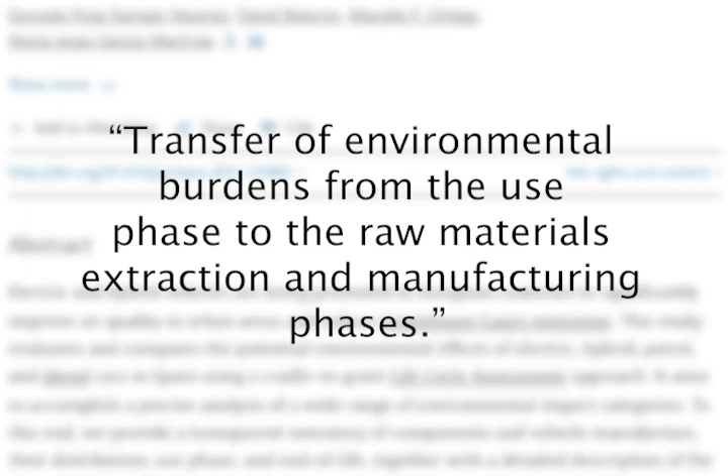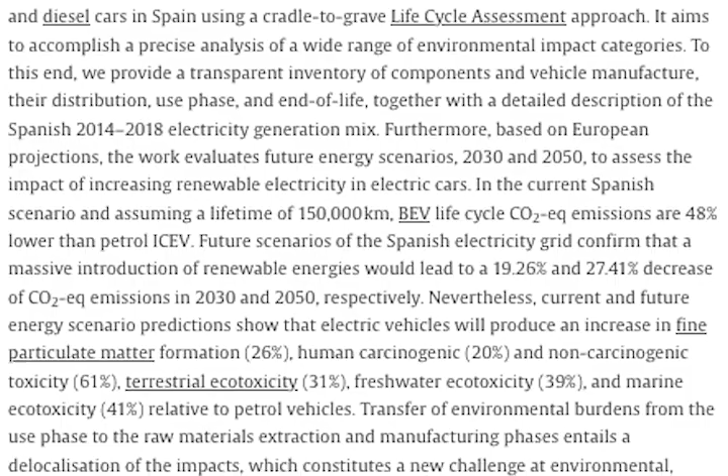Number 2, life cycle assessments reveal that electric vehicles, quote from the Journal of Cleaner Production, transfer environmental burdens from the use phase to the raw material extraction and manufacturing phases. It entails a delocalization but not disappearance of socio-environmental issues. For example, EVs' use increase marine ecotoxicity by 41% relative to petrol vehicles.

Number 3, EVs might have zero tailpipe emissions, but disregarding production and electricity generation impact is misleading. EV production creates between 12,000 and 20,000 kilos of CO2. Because our project works with used engines, there are no production emissions. The manufacturing of our system contributes less than 1 kilo of CO2.

The burning of vegetable oil creates around 0.2 kilos of CO2 per kilometer. Likewise, current electricity dependence on fossil fuels still creates 0.1 kilos of CO2 per kilometer driven for an EV.

Number 4, what do we do with the millions of diesel vehicles on the road today? Scrapping them would be a vast waste of resources. By using vegetable oil as a fuel source, we can continue to use vehicles that have already been manufactured, without depending on the continued extraction of fossil fuels.

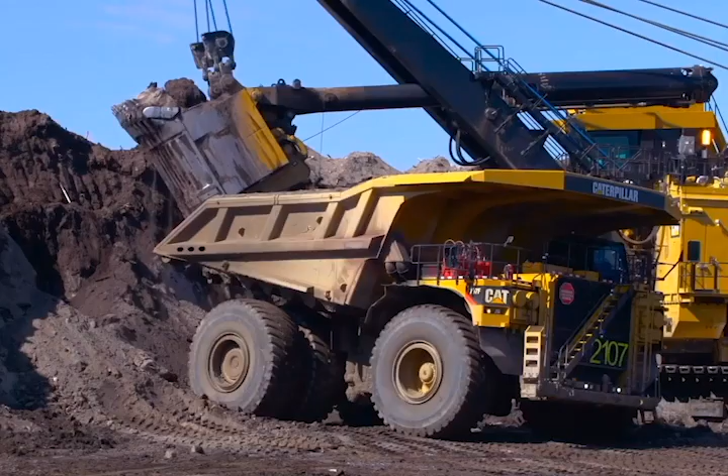Here in Canada, oil extraction from Albertan oil sands is, quote, one of the most environmentally degrading processes humankind has ever perpetrated, end quote, creating toxic tailings ponds visible from space. Waste vegetable oil is a renewable resource that is a waste product from the restaurant and fast food industries.

As living costs continue to rise, our fuel source has zero cost as restaurants usually pay to discard it, alleviating the financial strains of the average Canadian family who spends over $280 a month on gas. In addition, the global market for alternate fuels is projected to experience significant growth, already an additional $100 billion in the period of 2021 to 2022.

This is not all to say that we should discard electric vehicles and other new technology. As with anything, an energy transition requires balance and realism. We propose that our project can be a stepping stone to something greater. It raises important considerations for any new technology and highlights the importance of reducing consumption through reuse.

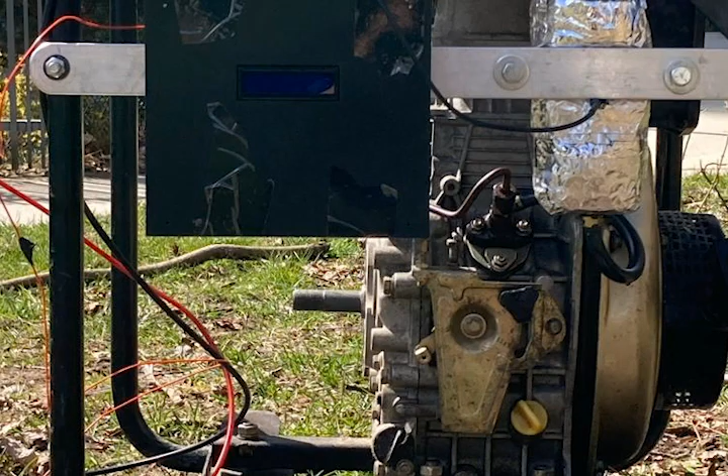Along with other research and innovations in the waste vegetable oil and biodiesel markets, we will contribute to a more sustainable future. The Veggie Motor Project aims to build a multi-component heated fuel filtration system that allows a diesel vehicle to run 100% on used vegetable oil, without chemical treatment.

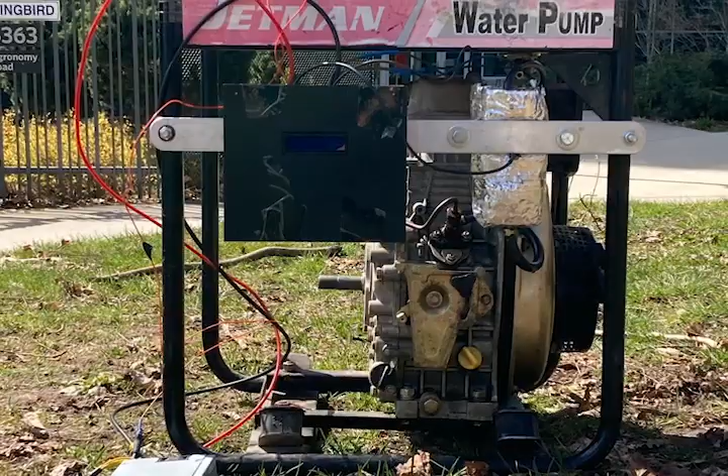Our current prototype consists of a heating system that can be integrated into a diesel engine's fuel system, allowing the engine to run solely on filtered vegetable oil while maintaining longevity and reliability. The scope of this project was to heat vegetable oil to 70 degrees Celsius. At this temperature, the oil will have a similar dynamic viscosity to diesel at room temperature.

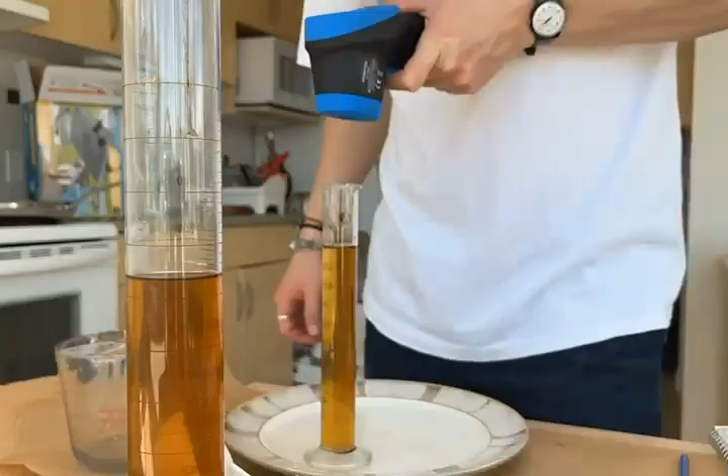This means that the vegetable oil can be used as a substitute for traditional fossil fuel without causing damage to the engine or its components and avoid excessive pressure buildup in the injectors. A basic viscosity test was conducted by measuring the time a metal ball takes to fall a set distance when immersed in oil at 70 degrees Celsius and less, going down in 10-degree increments. We compared the same test done with diesel.

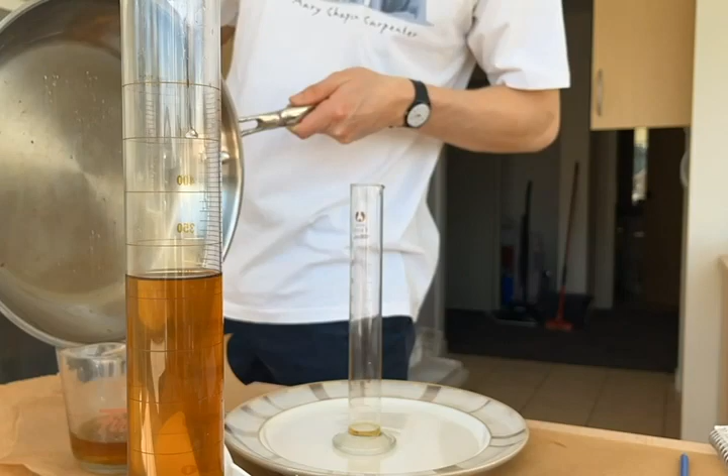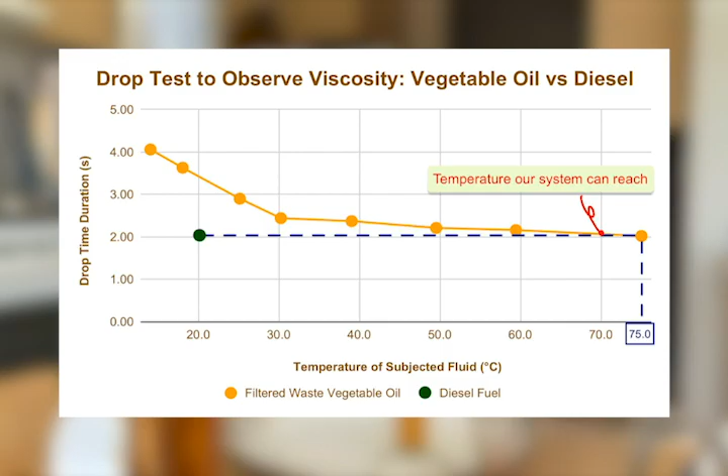The vegetable oil we used as fuel is olive oil from Jam Jar Canteen. Here is the graph of our results, and we see that around 70 degrees, the time for both vegetable oil and diesel are similar. We also tested if our single-cylinder diesel engine we acquired from a blueberry farmer in Surrey can run with vegetable oil at room temperature.

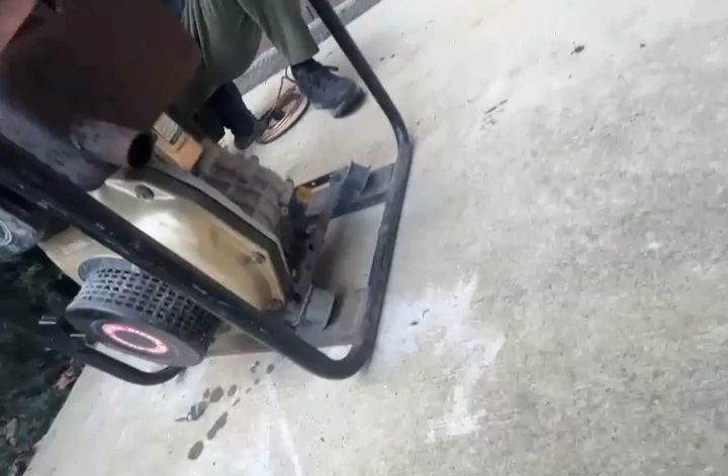As you can see, the engine ran on used vegetable oil with no issues. What are the components of our design? Here is a schematic of our final design, including the tank, heating system, electrical system, and engine.

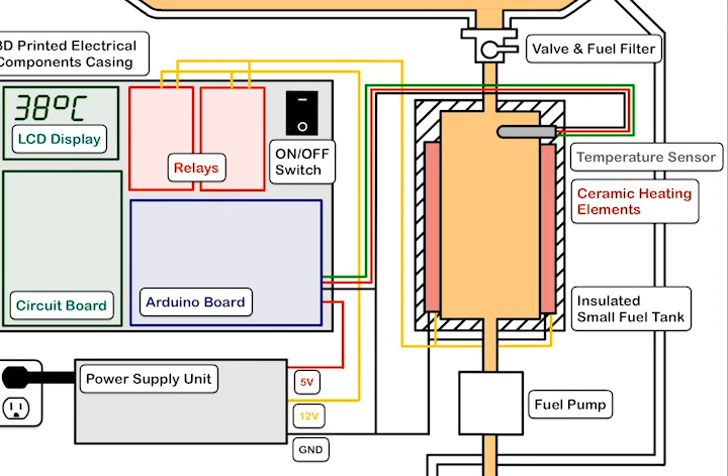The fuel system consists of two primary pressure zones. The low pressure zone is between the fuel tank and the fuel pump, while the high pressure zone is from the fuel pump to the injector. A secondary fuel tank is added to the low pressure zone. This tank is made of steel welded into a rectangular shape, and it can hold approximately 350 milliliters of fuel.

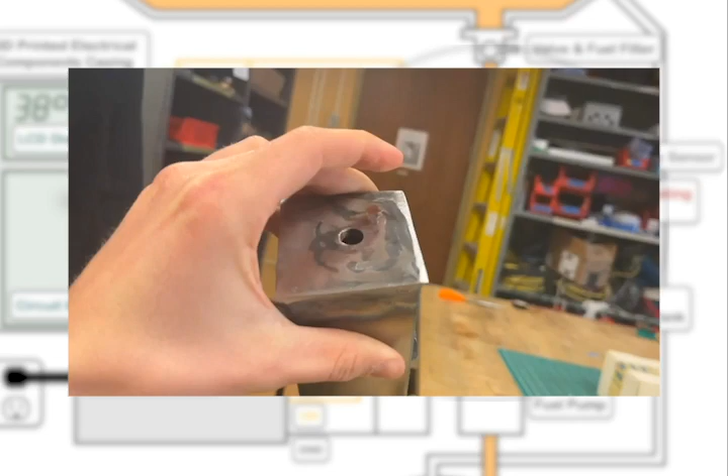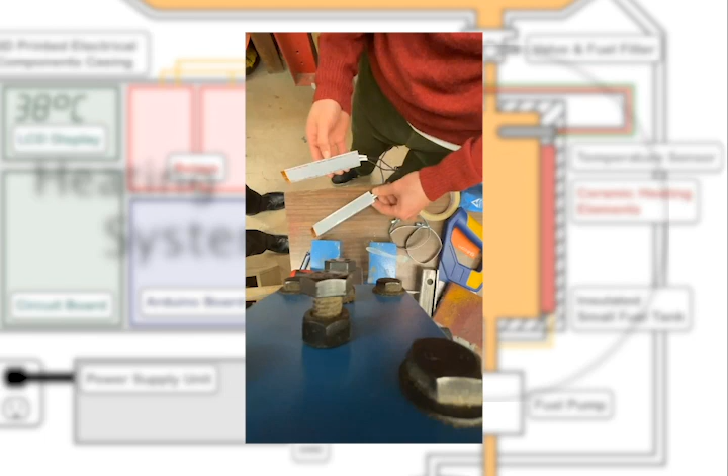Brass fuel line fittings are threaded into the top and the bottom of the tank, and the temperature sensor is fixed with epoxy to the inside of the tank. Two PTC heating elements, consisting of ceramic heaters within an aluminum casing, are each attached to the large faces of the secondary tank, with high thermal conductivity paste between them. The heating elements are able to heat up to approximately 70 degrees when supplied with 12 volts.

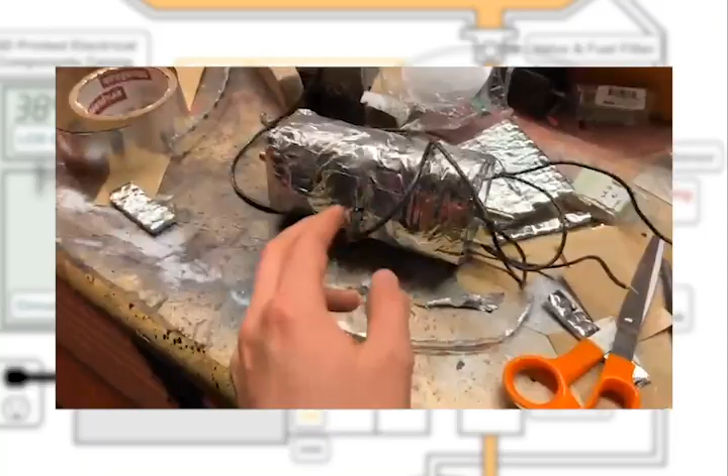The tank and the heating elements are insulated from the surroundings using reflective insulation material with low emissivity to achieve an efficient heating time. The electrical system of our design consists of hardware and software to read temperature in the fuel tank and control a high power system. An Arduino microcontroller is used to control a relay, read the temperature sensor through C++, and set the LCD temperature and relay's conditions.

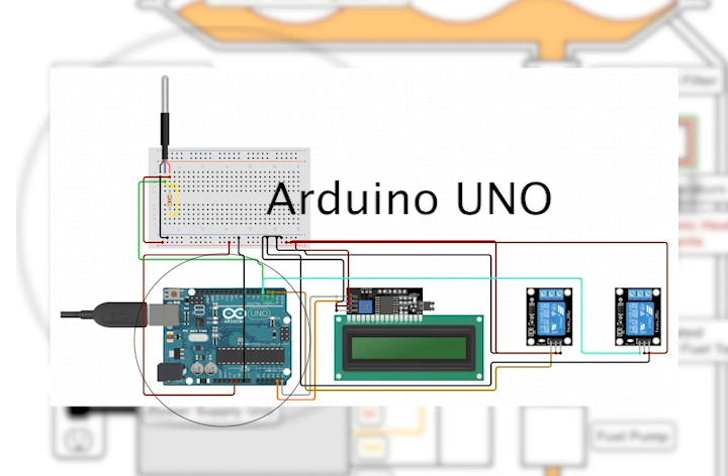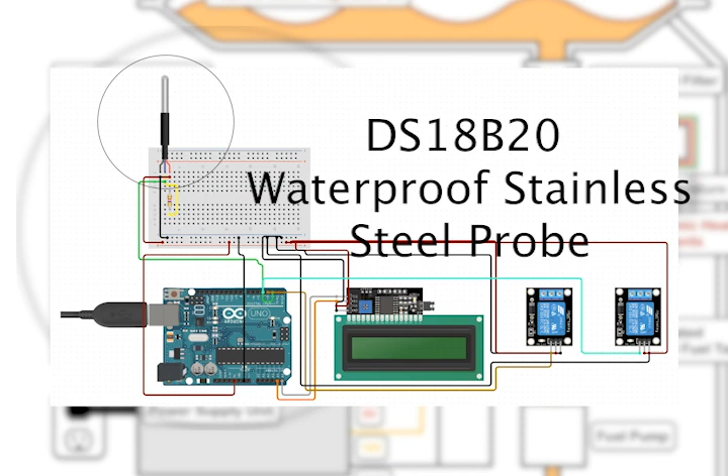The Arduino is programmed to turn on the heating element before starting the engine. It will indicate when the fuel tank has reached 70 degrees on the LCD. The waterproof temperature sensor is used to read the temperature within the tank where the vegetable oil will be heated. A one-channel relay with a maximum load of DC 30 volt and 10 amp will act like a switch to allow the power supply to supply power to the heating element when the temperature in the sensor is below 70 degrees and disconnect when it's over that threshold.

We power the Arduino and the heating element with a 12 volt computer power supply, but we plan to run the system off a car battery in an alternator system. The electrical system is housed in a water resistant case with cutouts for the LCD and power switch.

Our entire system relies on clean filtered oil to function correctly. For this reason, we drain the oil through 200 to 1 micron filters so that no impurities reach the injector. We drained and filtered multiple times in addition to letting the oil settle for a week, as you can see.

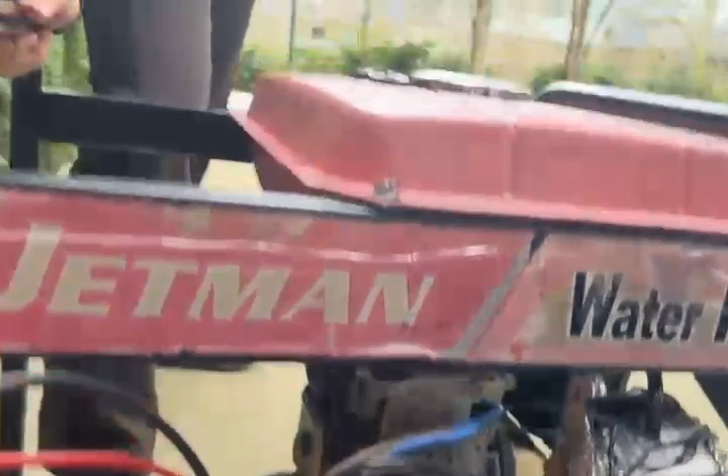Here is a demonstration of our prototype after the tank was heated up to approximately 65 degrees for about 15 minutes. The tank is at 61 degrees, filled with vegetable oil. Let's hit it.

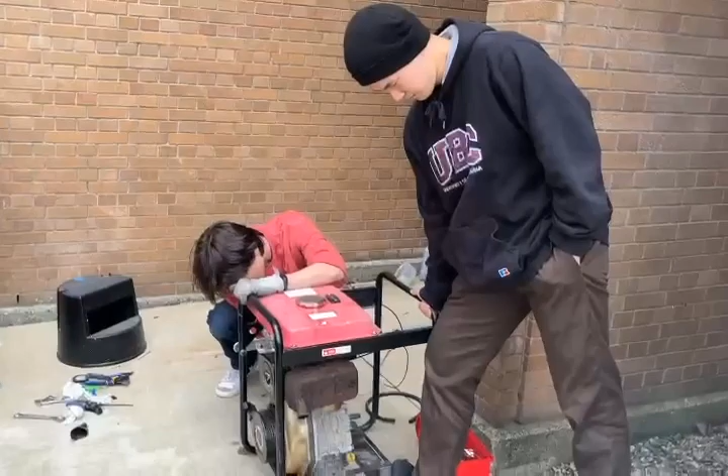The system is able to quickly reach a temperature of over 50 degrees Celsius and reliably reaches 60 in a span of 10 minutes. Although insulated, the tank's maximum temperature is heavily influenced by the ambient temperature, with a max temperature recording of 66 degrees.

Starting the engine on oil is a more challenging task than with diesel. Once running, the engine's performance seems to be unaffected. It idles smoothly and it has a quick throttle response, indicating a sufficient and constant supply of oil to the injector. For the electrical system, instead of using a relay to control the high power part of the system, we could use a transistor that can handle the required voltage and current because they are much smaller and faster.

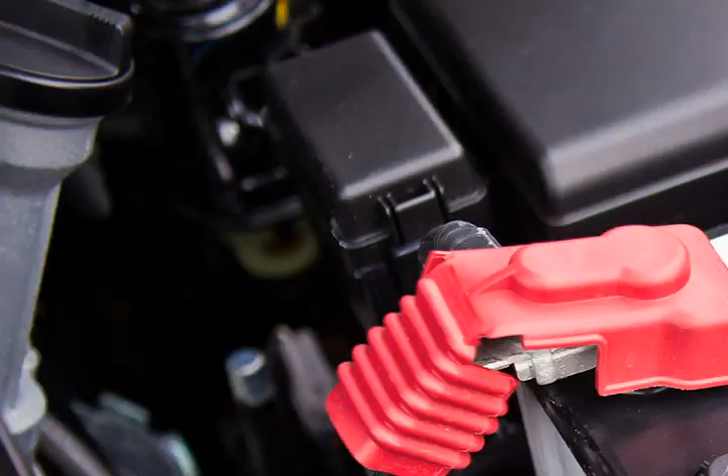For the future of this project, we hope to add a filtration system so consumers won't need to worry about filtering and only have to fill up like they would at a gas station. Since we use a computer power supply to power both the Arduino and heating elements due to budgeting reasons, we hope to replace it with a car battery for mobility and scalable vehicle applications. Also, to further test our system, we intend to install it onto a fully built go-kart or motorcycle and have a test run comparing diesel and vegetable oil.